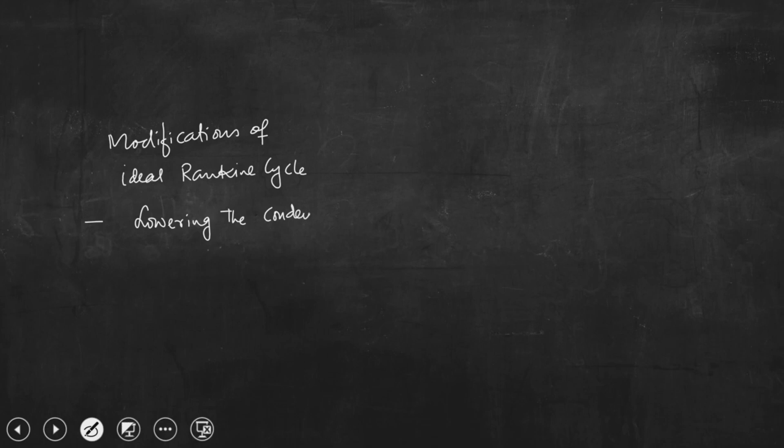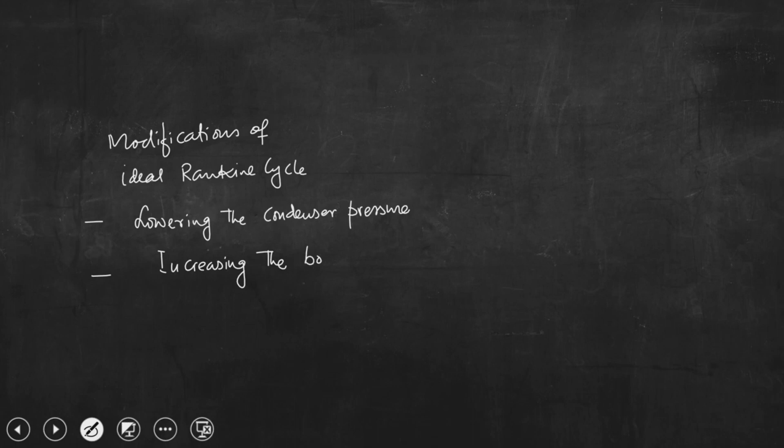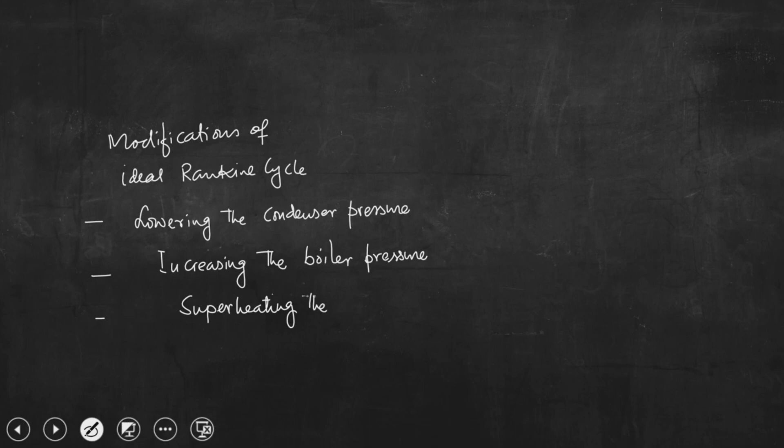If you try to recall, we have discussed about the Rankine cycle as well as several modifications of the Rankine cycle. So if we try to write again, what are those modifications? Modifications of the ideal Rankine cycle: one is lowering the condenser pressure, number 2 is increasing the boiler pressure, and number 3 is superheating the steam beyond a particular point, that is beyond point 3.

All these 3 modifications we have discussed essentially to have higher thermal efficiency. Nevertheless, we have also discussed about the demerits of every such modification in the context of the smooth and trouble-free operation of the plant, as well as the obligation of having higher thermal efficiency.

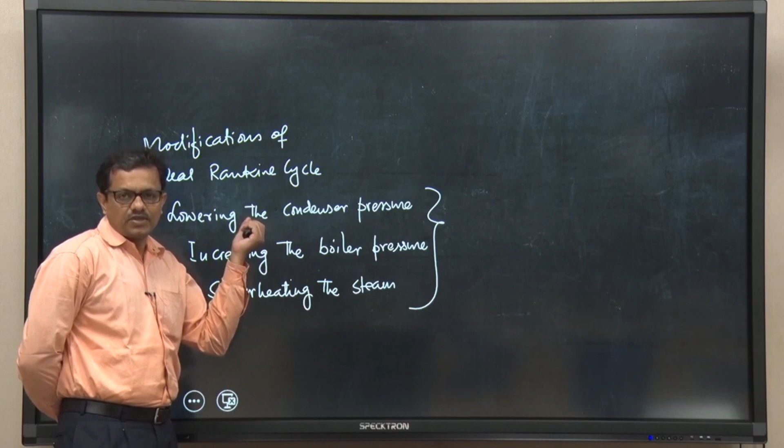What are those? We have seen that perhaps by lowering the condenser pressure we can achieve higher thermal efficiency, but doing this we are going to invite another problem, that is the quality of steam at the exit of the turbine becomes very poor, so it is not acceptable. Not only that, most importantly we cannot really reduce the condenser pressure drastically, because mostly condensers are operated at a pressure below atmospheric pressure. If we reduce it more, leakage of air from the surroundings into the condenser will occur, and this air will create a resistance for efficient heat transfer between the flowing streams, that is steam and water. So this is not suitable.

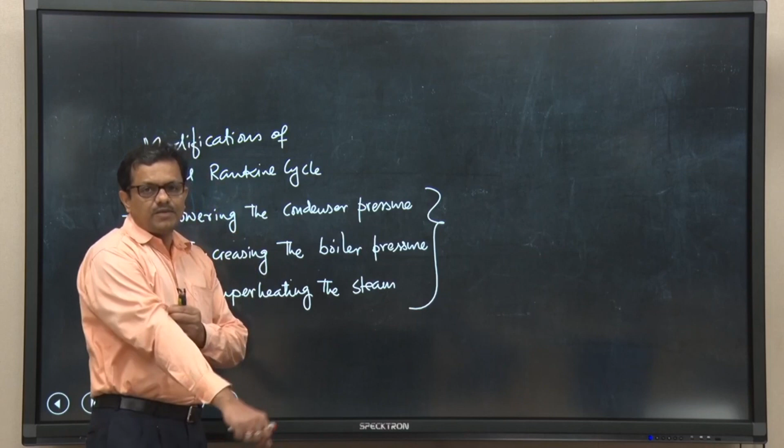If we look at the second one, that is increasing boiler pressure, we have seen that if we somehow design a boiler to operate at a higher pressure, perhaps we can increase the efficiency, but again we need to compromise the quality of the steam at the exit.

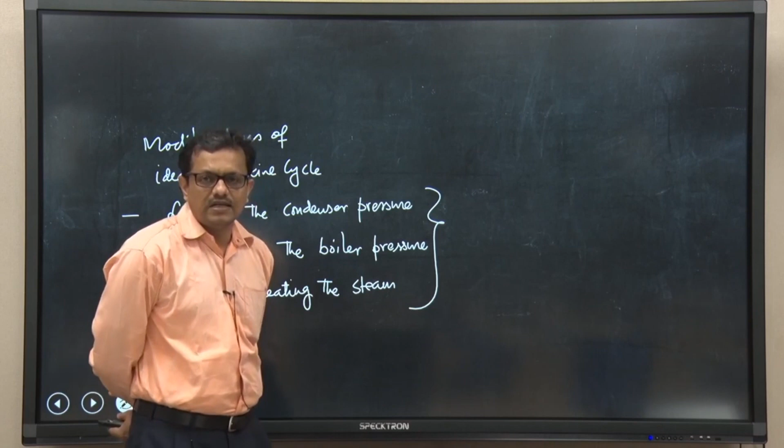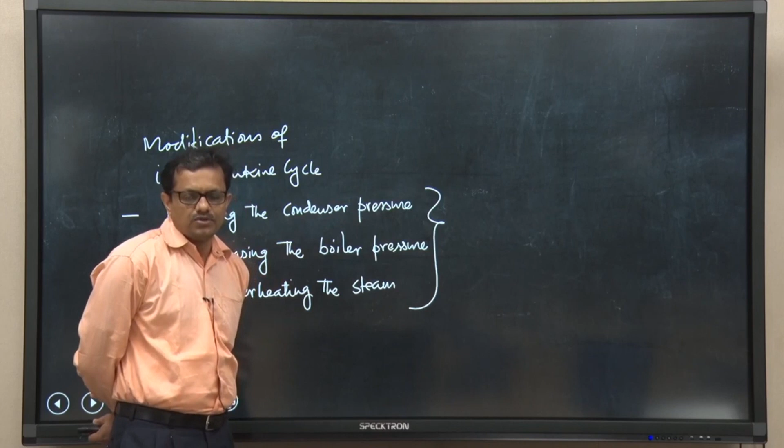The last one, superheating the steam, by adopting this modification we can increase the efficiency as well as the quality of the steam at the exit of the turbine becomes high, not very poor. So it is quite important to go with this modification, but we have discussed that we cannot superheat steam beyond a particular limit, because that is restricted by the metallurgical consideration of the blade. So if we rule this out as not feasible, even the second and third ones are not viable options for enhancement of the thermal efficiency of the power plant.

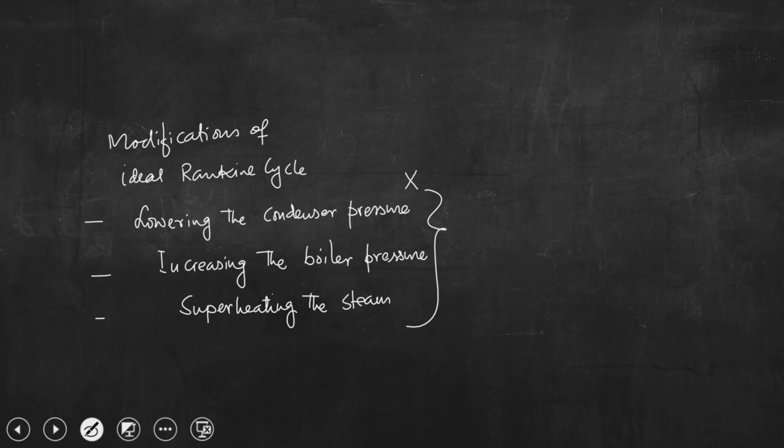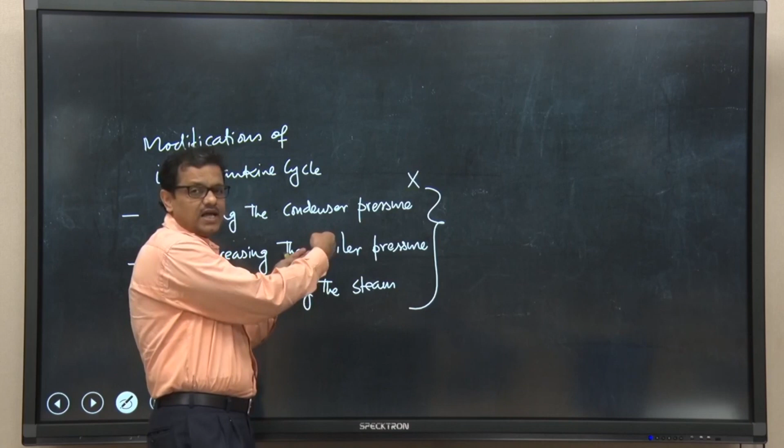So why not look into the combination of these two? If we can increase the boiler pressure, that means if we allow the boiler to operate at a higher pressure, together with superheating the steam, perhaps the problem associated with the reduction in the quality of steam at the turbine exit can be resolved. By superheating the steam and operating the boiler at a higher pressure simultaneously, we can achieve higher thermal efficiency. So the idea is to combine these two options into a particular cycle.

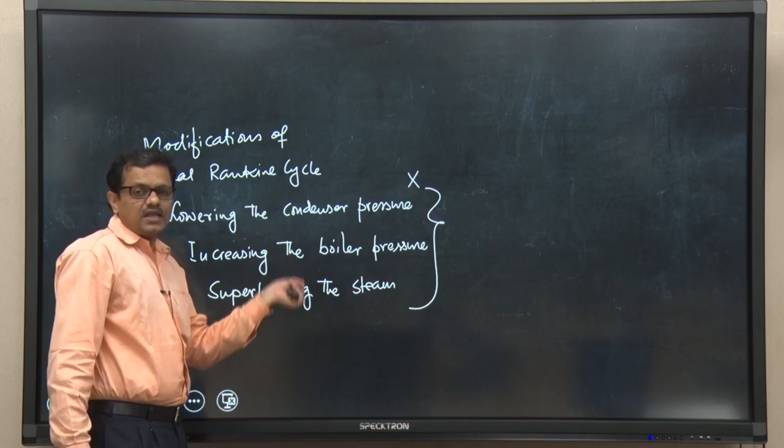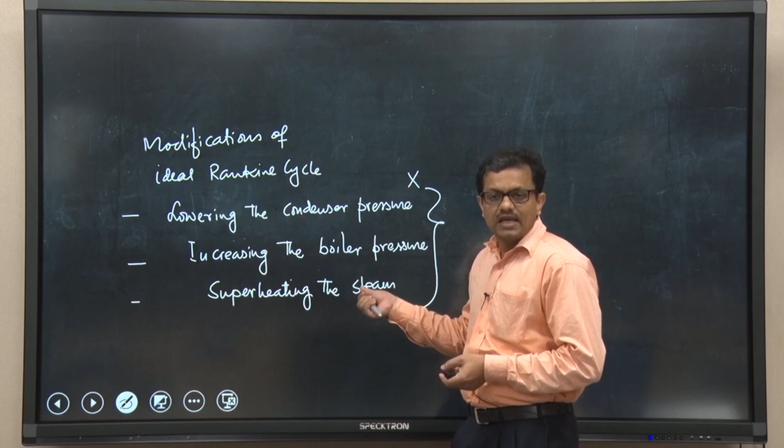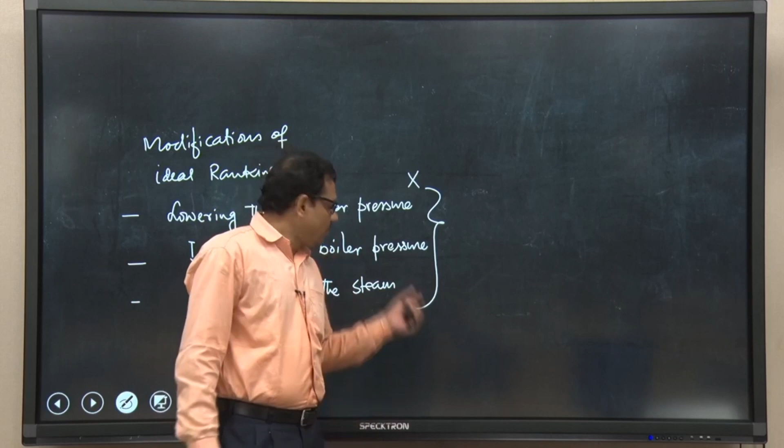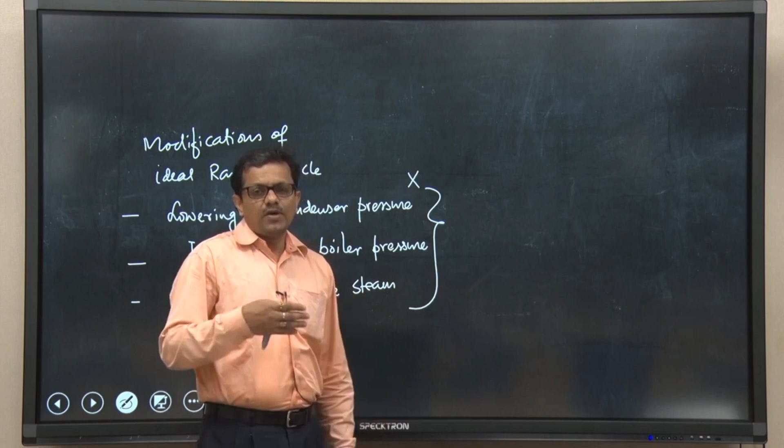To this end, reheat cycle aims at attaining a high thermal efficiency by making use of the high boiler pressure as well as superheating the steam, but at the same time eliminating the expected probability of reduction of the steam quality at the exit, while operating the plant at a temperature which will not cause any problem of turbine blade cracking, etc. So this is what is the reheat cycle.

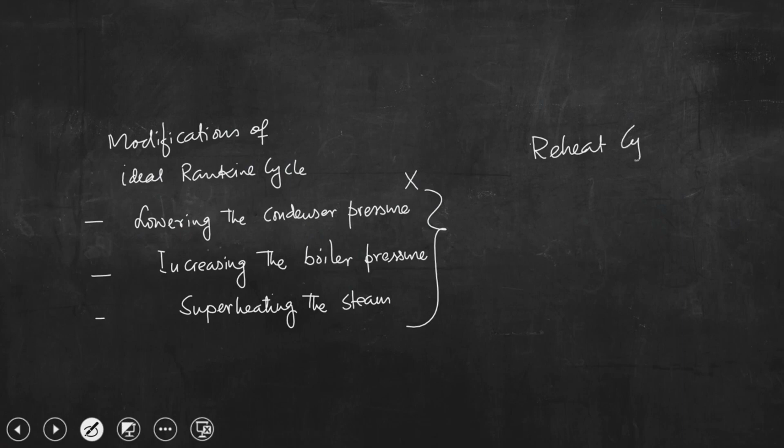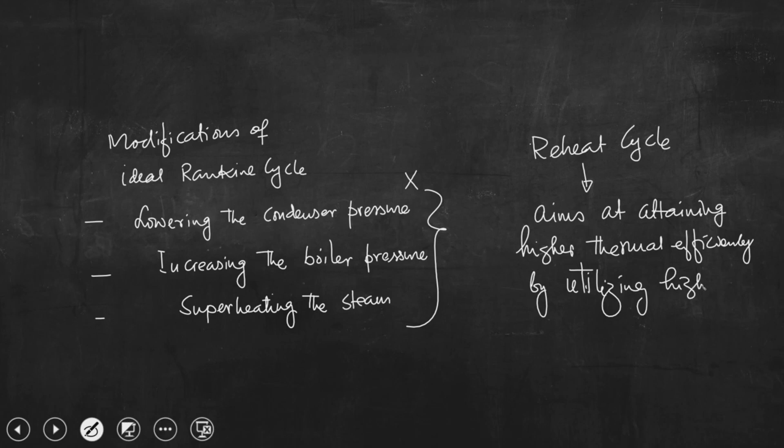So if we write reheat cycle: these cycles aim at attaining higher thermal efficiency by utilizing higher boiler pressure and superheating the steam. So this is all about the reheat cycle.

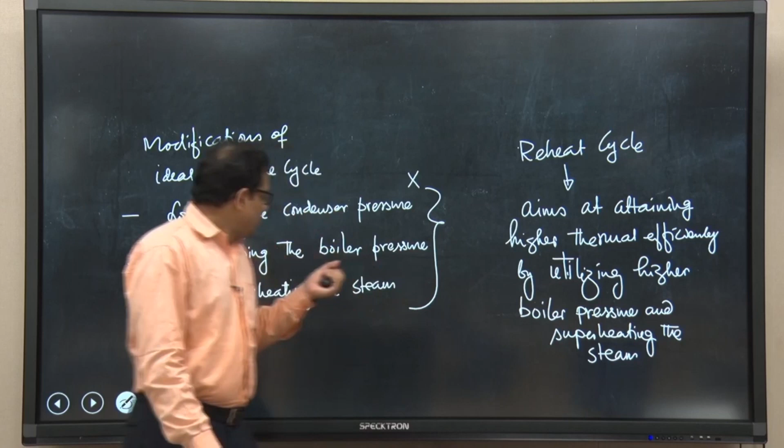Basically we are going from the Carnot cycle to the Rankine cycle, simple ideal Rankine cycle. We have identified several issues involved with the simple Rankine cycle. We have looked at the modifications, and having discussed each and every modification, we have critically discussed the disadvantageous features. Now we have found that the first one is not a viable option at all, even the second and third ones are not viable options, but we can use the combination of these two essentially to have high thermal efficiency, while eliminating the problem associated with poor quality of steam at the exit, as well as operating the turbine at a high temperature without any problem related to thermal crack generation in the blade. So this is essentially the reheat cycle.

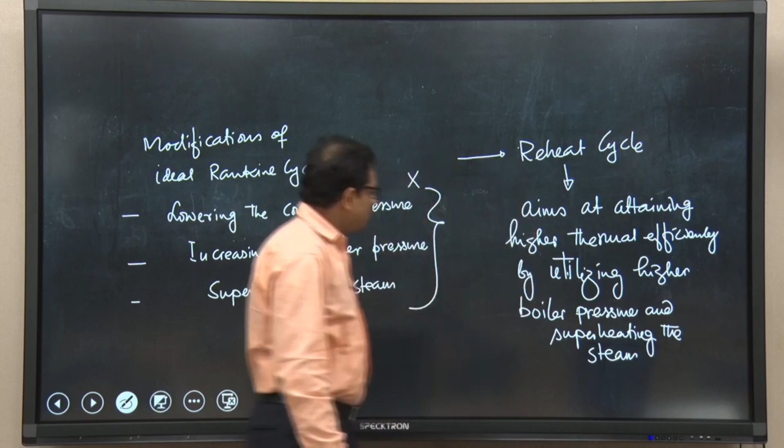So now let us go to the next slide and discuss a little more about this particular cycle, that is the reheat cycle.

So the idea is we will be designing a plant in which the boiler will operate at a high pressure, and also we need to go for superheating the steam. To accomplish this, steam is allowed to expand in two stages. So there are two different turbines, one is the high pressure turbine and another is the low pressure turbine.

In the high pressure turbine, steam will be allowed to expand isentropically. At the exit of the high pressure turbine, steam will be taken for reheating through a separate coil in the boiler, and that reheating will be done at an intermediate pressure. After reheating, the reheat temperature would be approximately equal to the same temperature as before entering the high pressure turbine, and this reheat steam will again be allowed to go into the low pressure turbine, wherein again steam will expand isentropically to the condenser pressure.

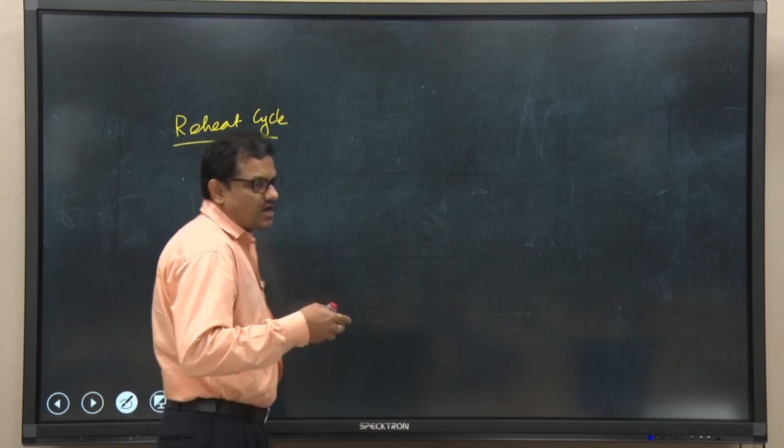So let us briefly draw the schematic diagram of such a cycle, and then we shall discuss. So if we draw over here, this is the boiler.

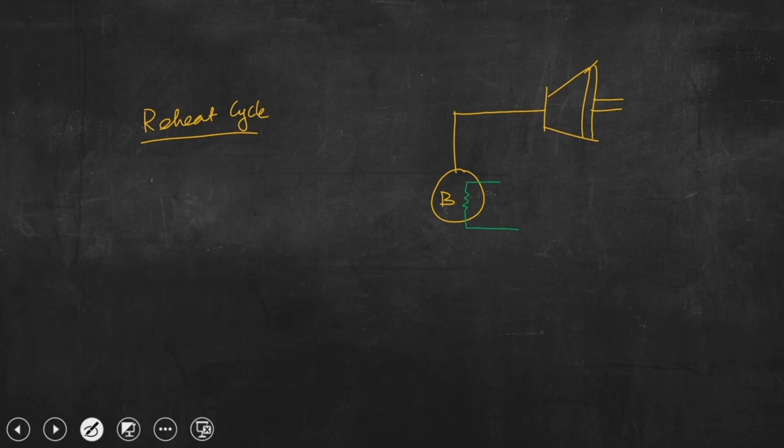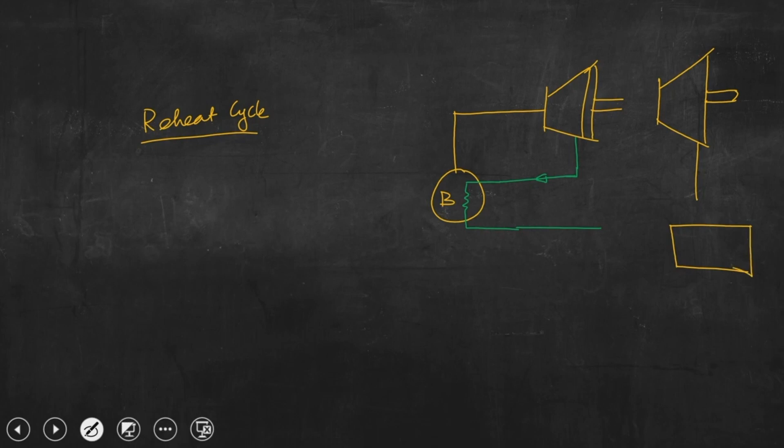So this is the condenser, and this is the low pressure turbine, this is the high pressure turbine, and from the condenser again... so this is what is the concept.

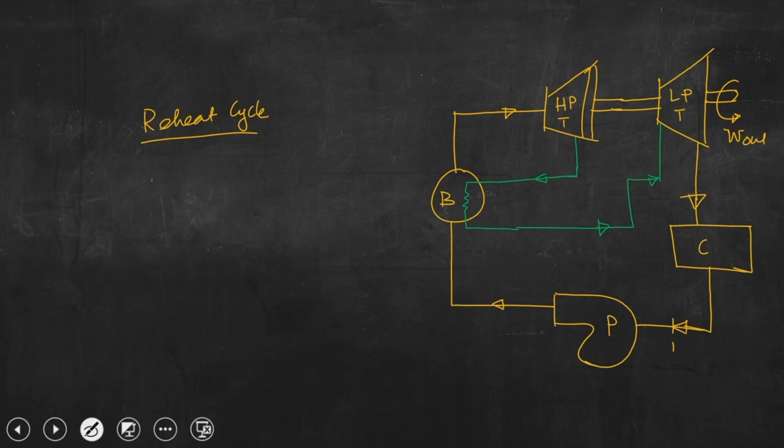Let us identify the states. This is 2, this is 3, 4, 5, then 6.

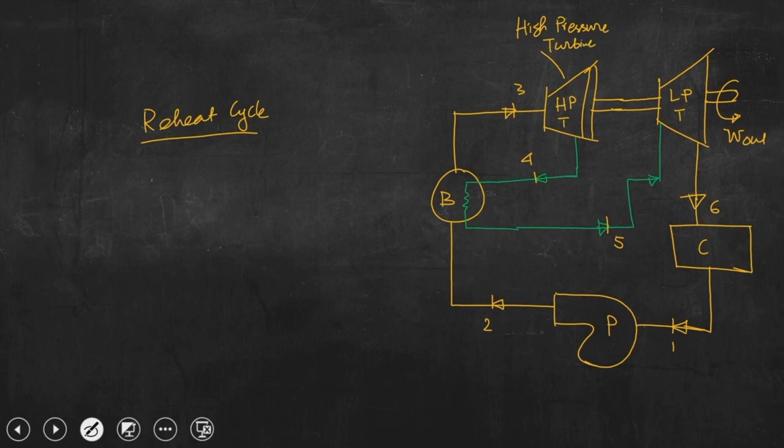So you can see, let me write here, this is the high pressure turbine, and this one is the low pressure turbine.

Okay, so you know that this is the concept. What is this different than the cycles we have discussed so far till now?

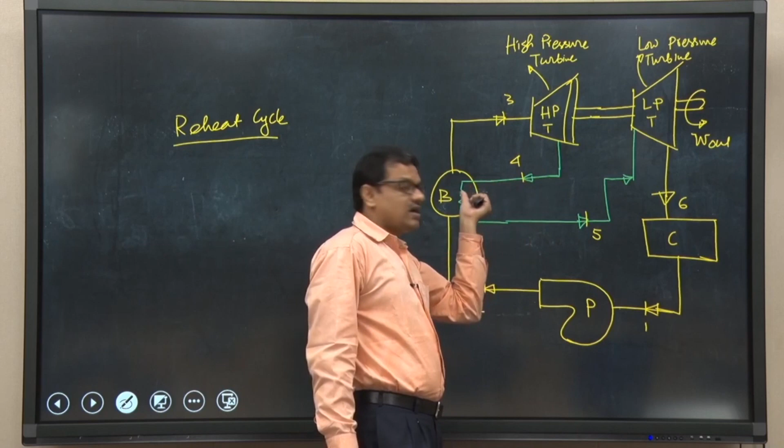So this schematic is different in one aspect: here the steam from the boiler will be taken into the high pressure turbine, steam will expand isentropically, and at the exit from the high pressure stage turbine, that steam will be directed to a heating coil placed in the boiler. While passing through this heating coil placed inside the boiler, it will be reheated again, and that reheated steam will be taken to the low pressure stage turbine, wherein again the steam will expand isentropically up to the condenser pressure, and the remaining part is as usual.

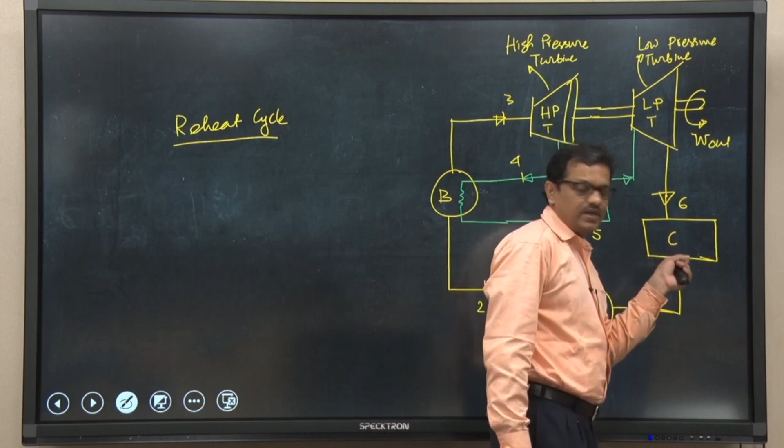So basically the condensate collected in the condenser will again be pumped back to the boiler. So this is basically the place where we will be having a Q out. Let me erase it and write this is Q out, this is Q in, and this is W in.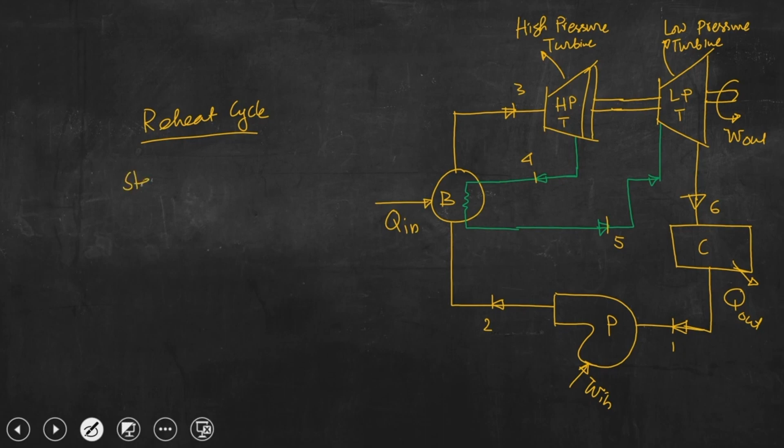So again, I am telling, the idea is steam will expand isentropically in the first stage, that is the high pressure turbine, and this expansion will continue at an intermediate pressure. So you can understand steam is getting expanded. As steam expands in the high pressure stage turbine, this expansion process continues at an intermediate pressure. So steam will expand isentropically in the high pressure stage turbine up to an intermediate pressure.

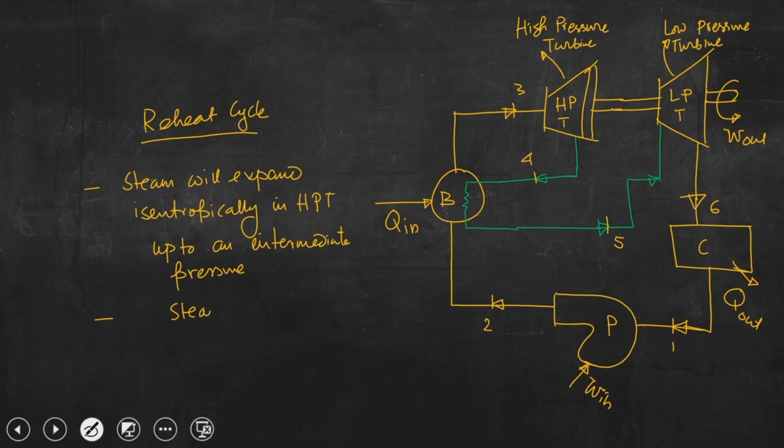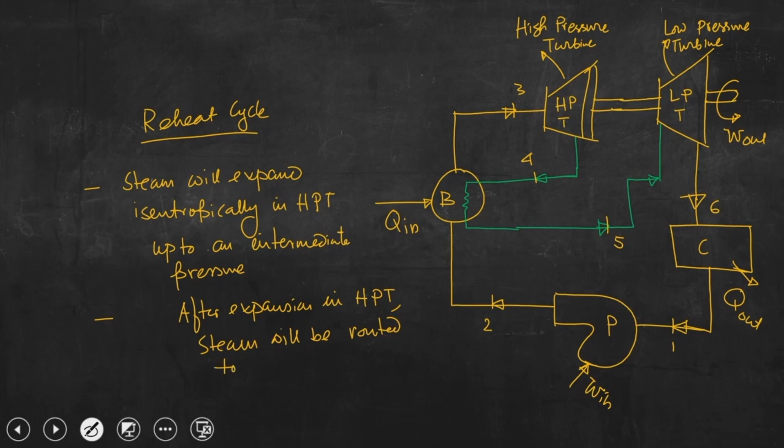So this is not the condenser pressure, right. Then the steam will be taken after expansion in the HPT, in the high pressure stage turbine, and steam will be routed to the reheating coil placed inside the boiler. So this is the coil.

Okay, so while steam is taken to this reheating coil, let me write here, this is the reheat coil. And then this steam after heating, this heating is continued approximately equal to the same temperature it was having at state point 3.

So this is very important, let me write: steam is reheated approximately equal to the original superheat temperature.

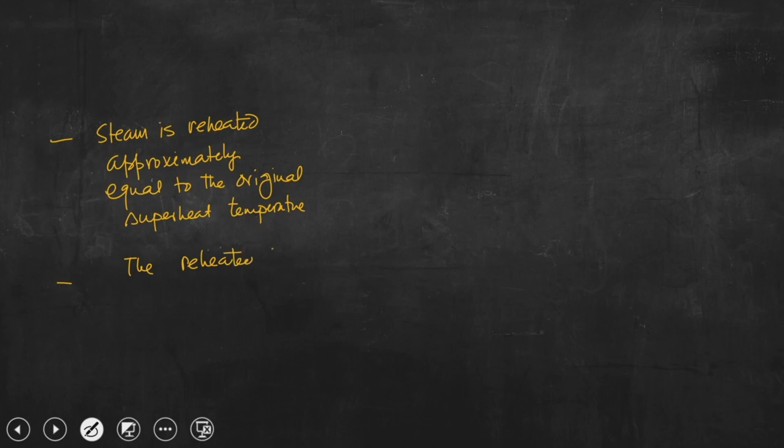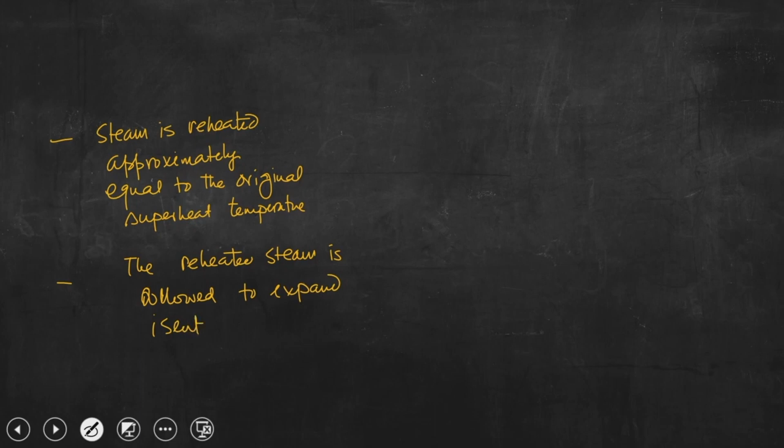Okay, finally the reheated steam is allowed to expand isentropically in the low pressure stage turbine, and this process continues up to the condenser pressure.

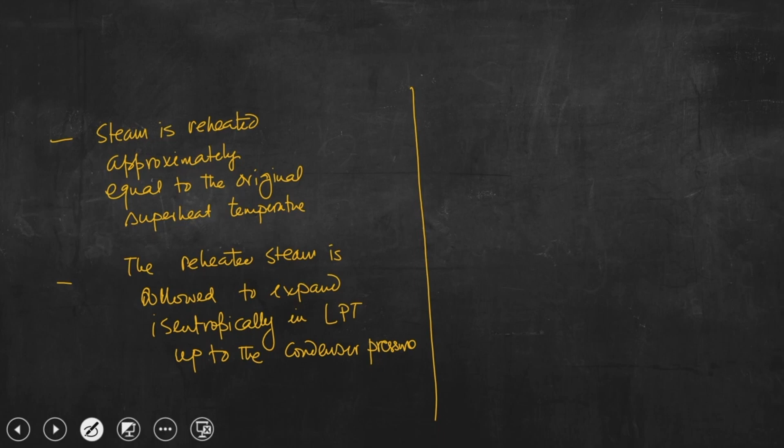Okay, so this is all about the processes, and you can understand the remaining processes are as usual, as we have seen. So up to the condenser pressure, it comes to the condenser exchanging heat with the coolant circulated into the condenser, and that collected condensate is pumped back to the boiler. So this is the usual process we have discussed.

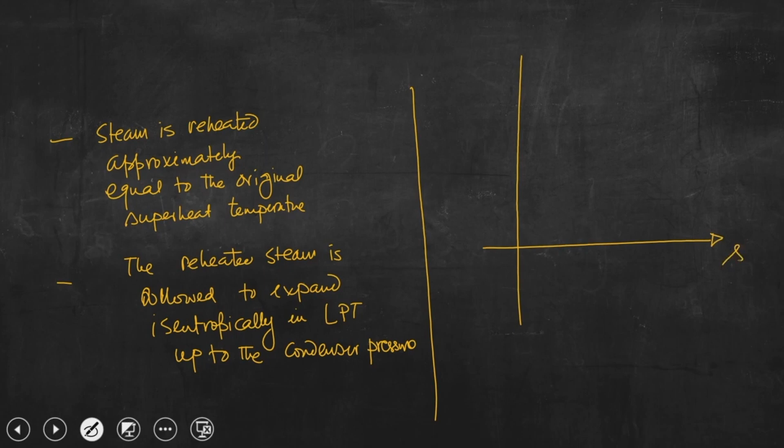So if we now draw the TS diagram, which is very important, let's draw the process. So this is the condenser pressure, P condenser.

If we go back to the previous slide, this is state point 1, wherein the thermodynamic state of the working substance is saturated liquid. So this is 1, and this is pumped to the boiler.

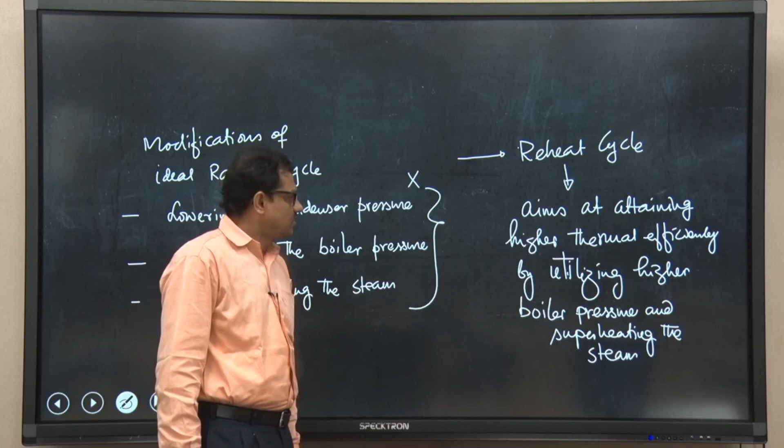The objective is the pressure will increase and the boiler operates at high pressure, because our objective was to combine these two modifications, so we can have high thermal efficiency without reducing the quality of steam at the exit of the turbine. So, say this is the boiler pressure.

So this is point 2, and this is the boiler pressure. So this is point 3.

Now we are using this too. We are allowing the boiler to operate at high pressure as well as superheating the steam beyond point 3. That means steam is going into the high pressure stage turbine and it does work.

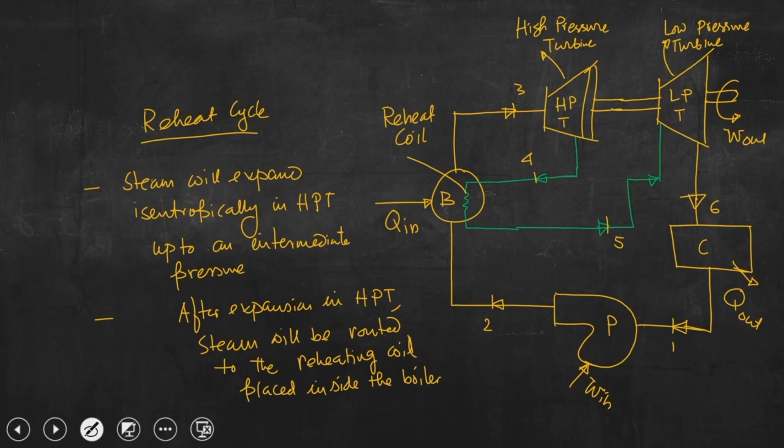These two turbines are connected to a common shaft. While expanding in the high pressure stage turbine, it does work on the rotating part of the machine, and steam after doing work is taken to this reheating coil. This expansion in the high pressure stage turbine takes place up to an intermediate pressure.

If I erase it and use another color to represent it, say this is an intermediate pressure. This steam is reheated in this coil, up to approximately equal to the original superheat temperature. So if I give a line over here, this is the reheating temperature.

So this point is 4, this point is 5, and then steam is allowed to expand at intermediate pressure, and steam is allowed to expand further. So this is 6. Now I will erase this part to help you understand.

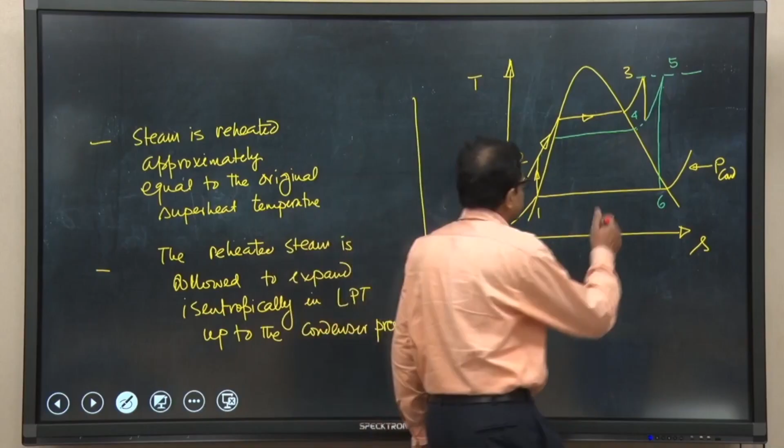What is important to note is that if we allow steam to expand in the high pressure stage turbine isentropically up to the condenser pressure, in that case the quality of the steam will be, so this is 6 prime.

So this is x6, and this is x6 prime. You can understand the quality of steam is becoming higher if we reheat steam. Also we can have higher thermal efficiency, because W net is getting increased. This is the extra amount of work, delta W net, we are getting because of this reheating.

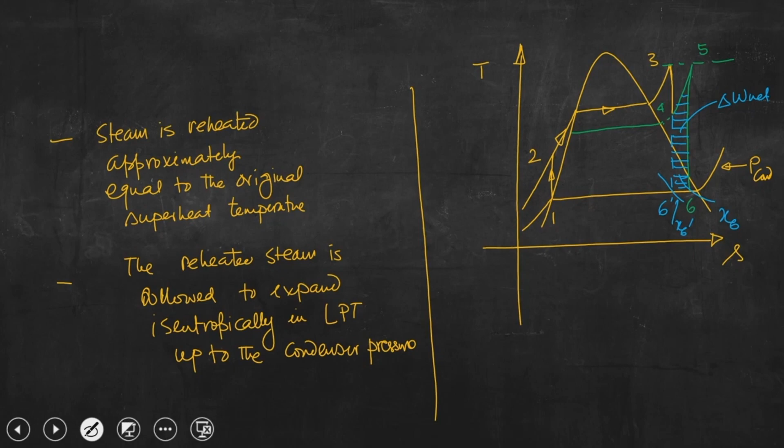So if we allow steam to expand in the high pressure stage turbine up to the condenser pressure, quality of the steam will be x6 prime. So x6 prime is definitely less than x6.

So basically we can increase the quality of the steam at the exit of the low pressure stage turbine. Not only that, we also can increase the efficiency, that delta W net is getting increased, clearly visible from the TS diagram. This is the practice commonly followed in modern steam power plants.

Now, we have drawn only one reheating stage. It is also possible to have multiple reheating stages. If we can have multiple such stages, perhaps efficiency can be increased even better.

So for a given single reheat stage, efficiency increases by 4 to 5%. By having only a single reheat stage, we can increase efficiency by 4 to 5%.

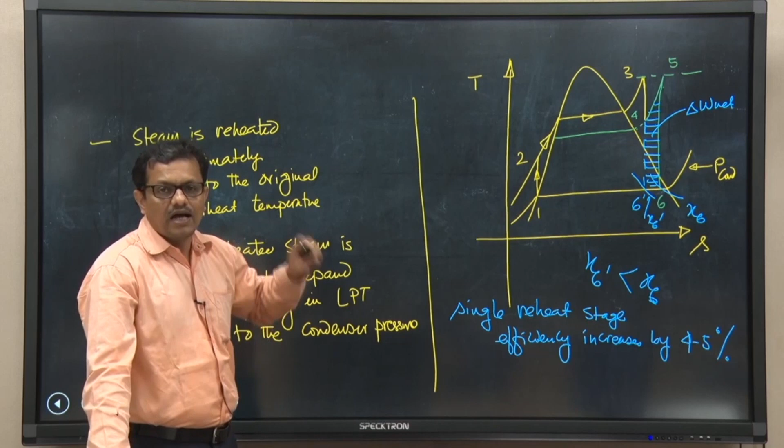Now, if we try to analyze why it is so: by reheating the steam, we are essentially increasing the average temperature at which heat is added in the cycle. Thermal efficiency will increase if we increase the average temperature at which heat is added to the higher temperature part of the cycle. So by reheating the steam, due to this complex arrangement, we are increasing the average temperature at which it is added to the cycle, and due to this we can have this amount of increase in thermal efficiency, by having a single reheat, by 4 to 5%.

But now you may ask, why can't we go for multiple reheating stages? It is recommended that we can go for multiple reheat stages, but 2 to 3 reheat stages are recommended. Why?

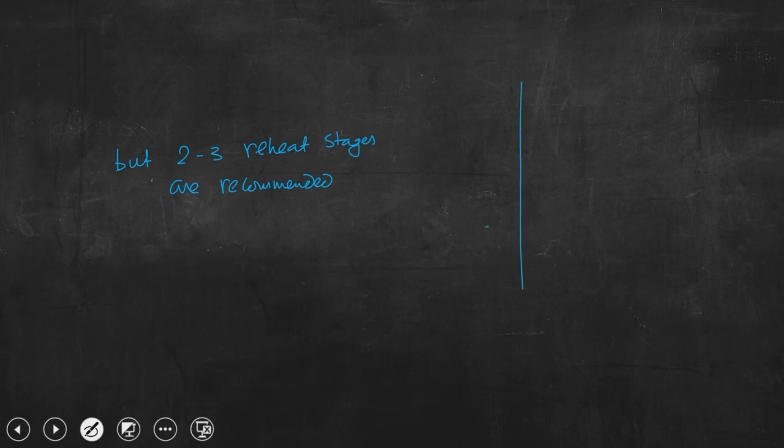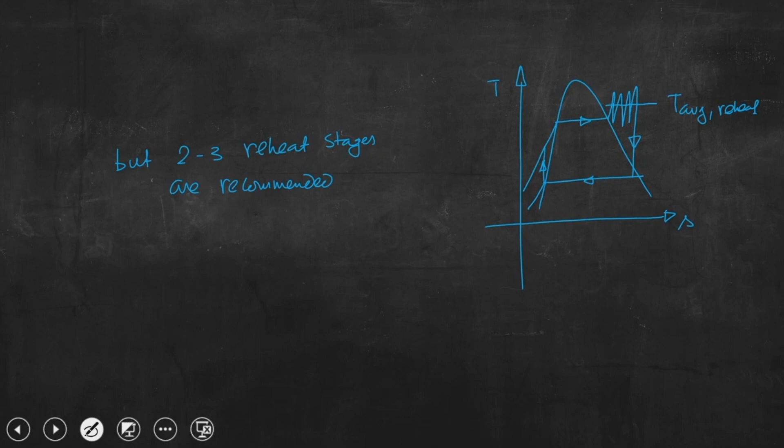See, if we again draw the TS diagram, so if we have such a multiple reheating stage, essentially, this is the T average reheat. So, if we increase multiple reheat stages, the average temperature at which heat is added to the cycle will increase and the efficiency will increase. But why then is it true that 2 to 3 reheat stages are recommended? Why is this recommendation there?

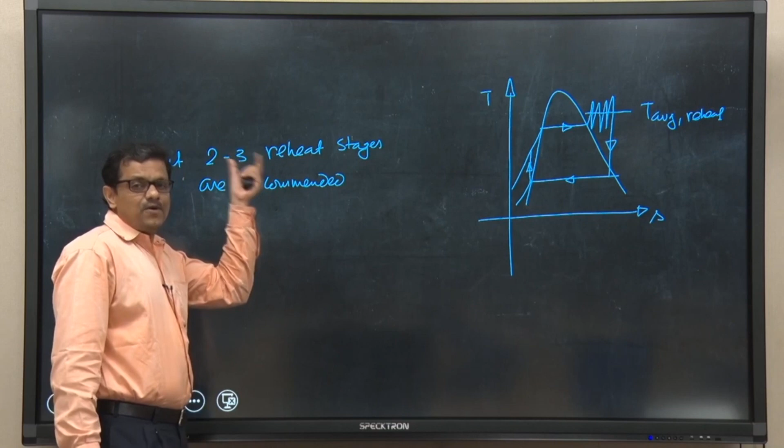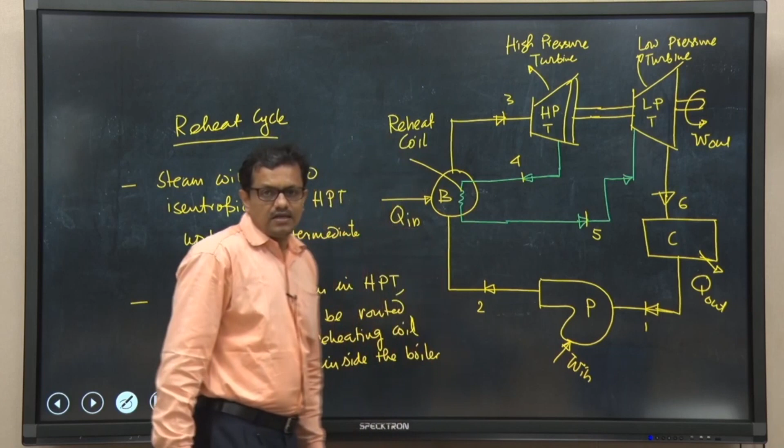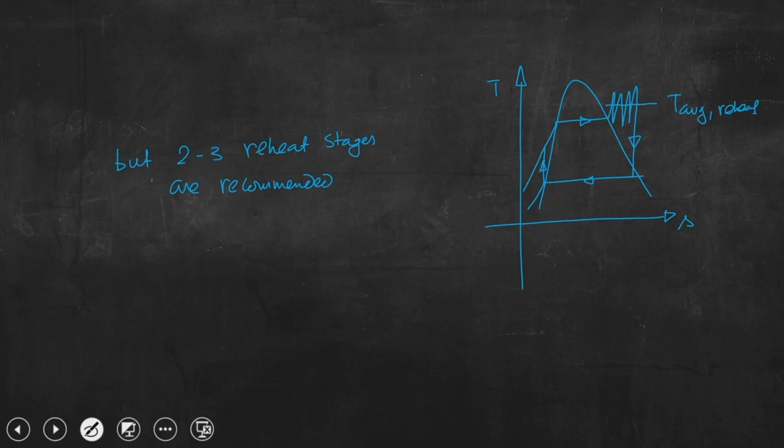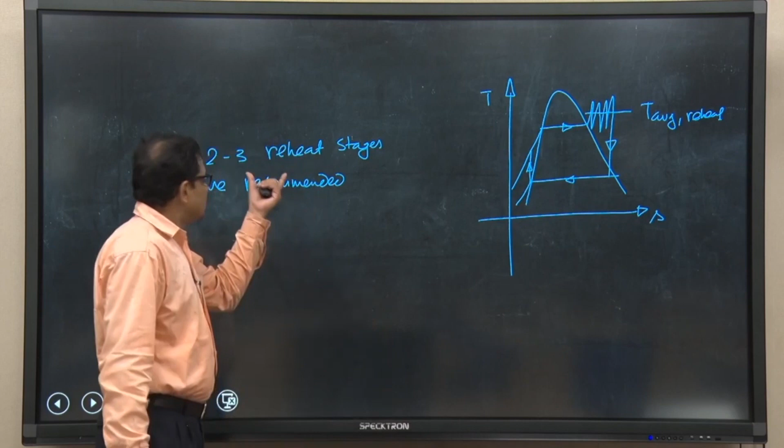Because if we keep on increasing the number of reheat stages, if we look at this particular schematic, you can understand that for only one reheat stage, so many arrangements are needed. So, if we keep on increasing such reheat stages, the additional cost involved with the mechanical components and their maintenance will not be justified by the increment in efficiency. So we can go for multiple reheating stages, average temperature will increase, efficiency will increase, but 2 to 3 reheat stages are recommended, considering the cost involved with the additional arrangement as well as the efficiency we will be getting.

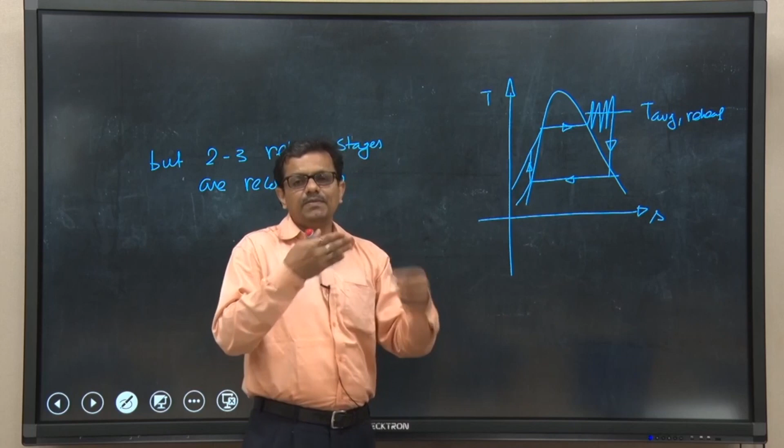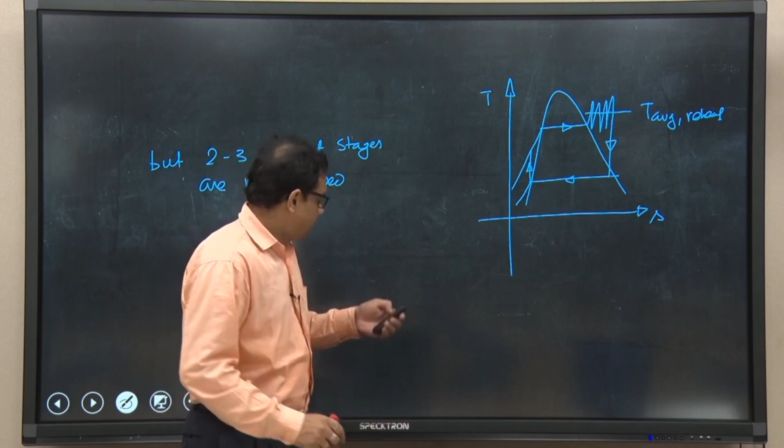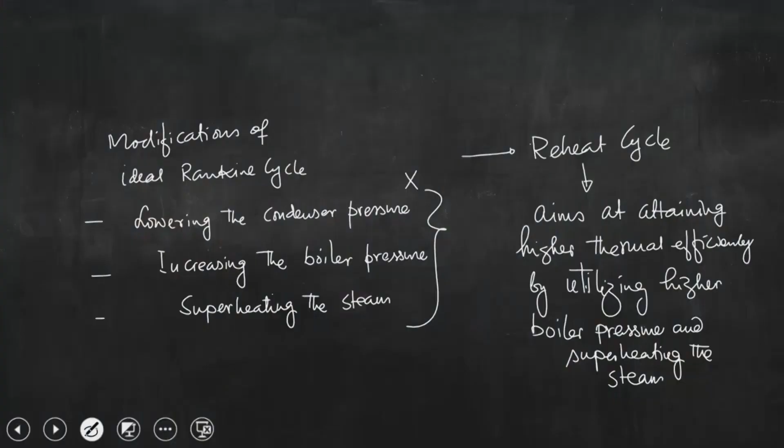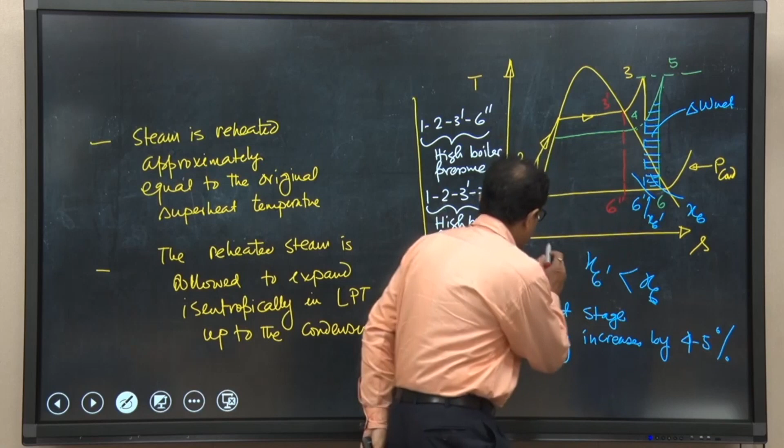Even if we are going for another reheat stage, we are going to increase the average temperature. That means we are increasing high boiler pressure to achieve high thermal efficiency, but if we do not superheat the steam, the quality of the steam will be reduced. So x at 6 double prime is even less than x at 6 prime. So to increase the quality of the steam at the exit of the turbine, we need to go for superheating. So the idea is to combine these two modifications, and that is what the reheat cycle is.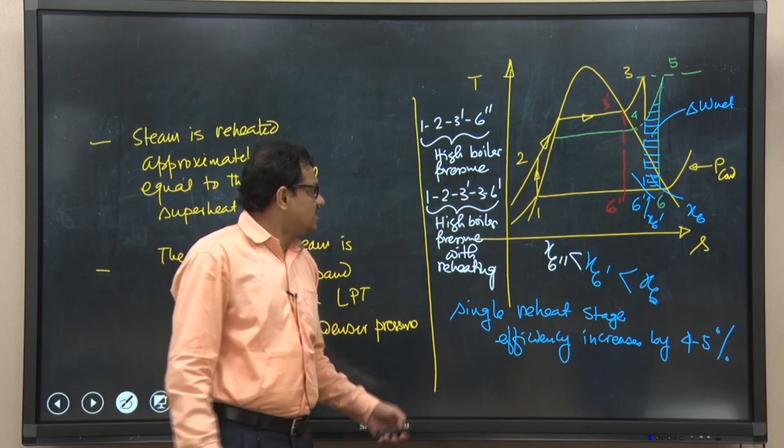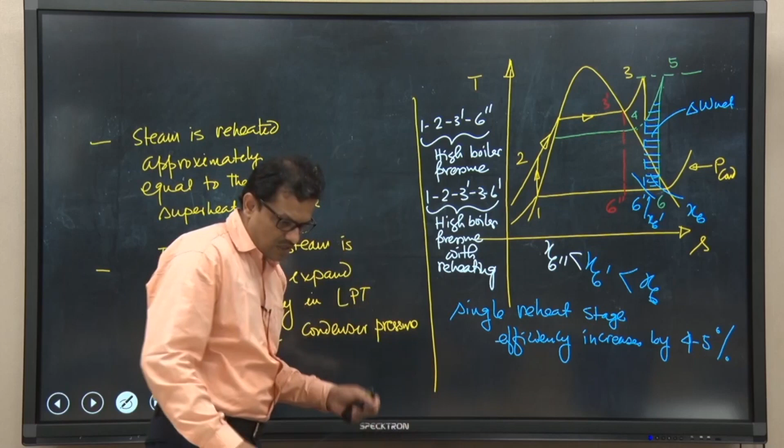So we have discussed the operational aspects of this particular reheat cycle, and also discussed critical issues, including why beyond 2 to 3 reheat stages it is not economically advisable to go further. But one important advantage is that for the same mass flow rate of steam, we can increase the efficiency. That means we are getting higher work output, so the net amount of work output becomes higher for a given mass flow rate of steam.

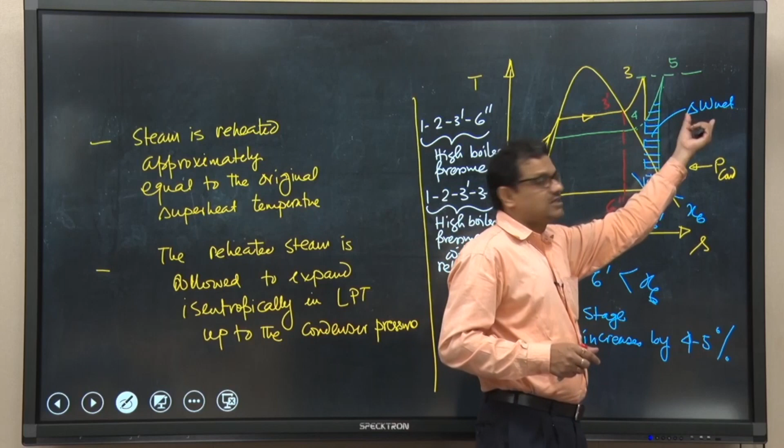This signifies that specific steam consumption will be low and the plant will be smaller. So if the plant is smaller, the initial cost would be less. For a given mass flow rate of steam, we are increasing the efficiency by increasing this net work, W net, signifying low specific steam consumption. That means, for a given work output, it requires less mass flow rate of steam.

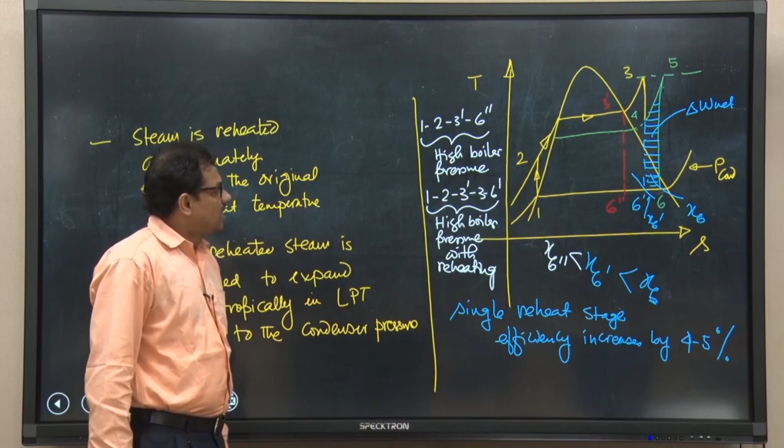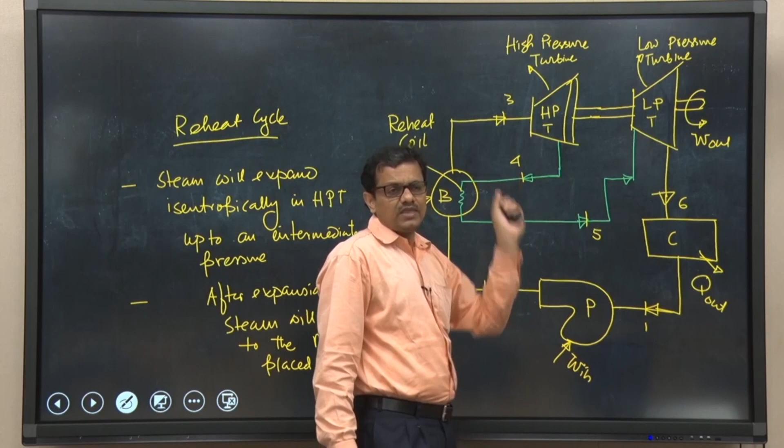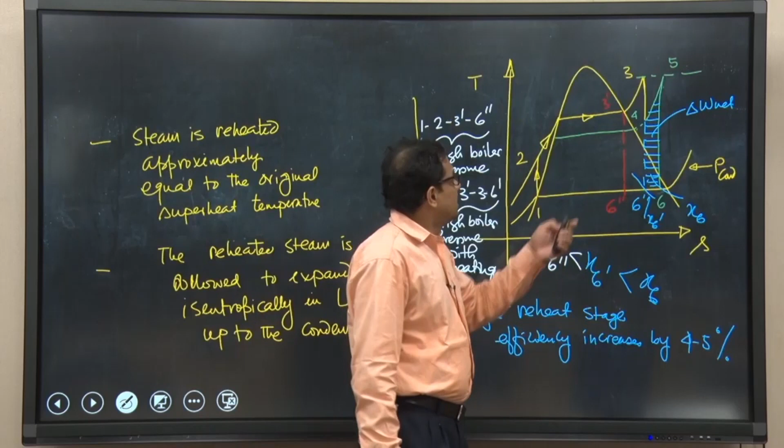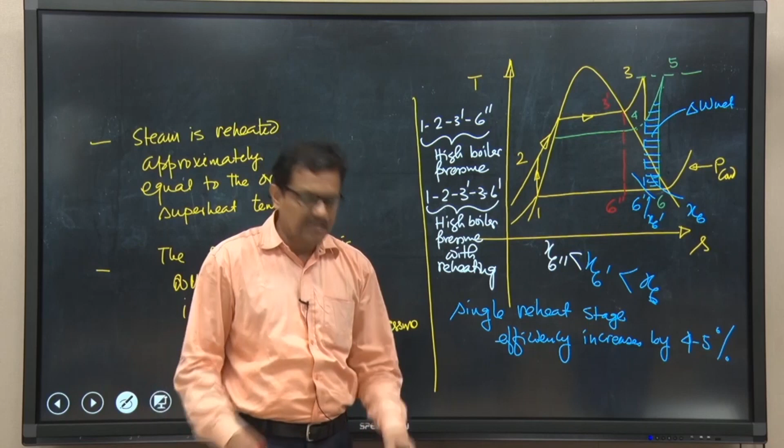Now, having discussed this particular reheat cycle, I would say that taking steam from the high pressure stage turbine, the steam coming out has huge enthalpy. So we need to make sure that while the steam is again taken to the boiler, enthalpy should not be lost. It is reheated in the boiler in the reheating coil and taken back to the low pressure stage turbine, but mechanical cost is involved. Instead of this arrangement, if it is possible to have a special blade material which can withstand the same amount of temperature, then perhaps it is not advisable to go with this reheat cycle. So the idea is, if the turbine blade material can withstand high temperature, there is no need for reheating the cycle. This is what I wanted to discuss today.